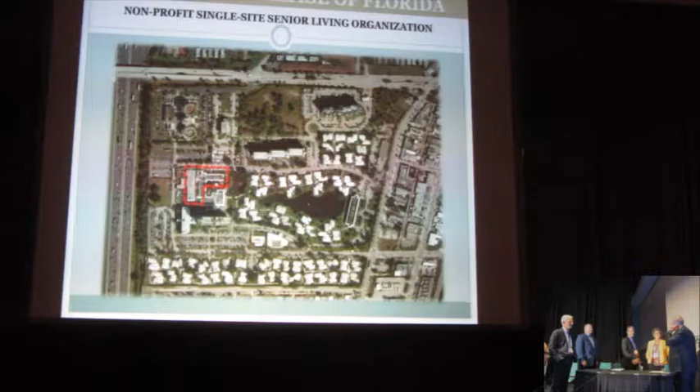Good afternoon. Well, where is John Knox Village? We're in South Florida. We're approaching our 50th year as we enter 2017. With a little over 1,000 residents, we went on the journey to replace our health care with close to 12 homes, or 144 residents of our 194. We're also within the top 3% of the communities across the country that have a rating of A-. So we had good, sound financial backing. Well, here's the campus, and the red area really depicts the healthcare center that we have on this 70-acre campus. And you'll see some pictures in the upper area where we moved it to.

How many of you, by a show of hands, have been in a skilled nursing residence? Well, these pictures should look pretty familiar to a traditional grandma's nursing home. Long hallways, medication carts, nurses' stations, semi-private rooms. Folks, we can do better than that, and we should.

We went about repositioning our healthcare at John Knox Village by making sure that all of the stakeholders, from our board of directors to our residents to our staff and our greater community, all understood that Greenhouse wasn't where we were growing plants, it was where we were growing people. They weren't coming there to die in a nursing home. Yes, people die, but people have an opportunity to live out a life and thrive. We focused on person-centered care. We've heard that for many years.

But empowering the staff is not just turning the keys over to the staff, it was taking the hierarchy from doctor, nurse, caregiver and flipping it upside down, so that we could have 128 hours of additional training that the staff would go through so that they truly knew the elder and they would be the best ones to help in the care decision making and also in making a real home.

We had residents that were involved in our community, and they really wanted to make sure that they had private rooms, private baths, and that at the same time we could jump the market. Instead of just painting and putting new carpet down in a semi-private skilled nursing residence or creating private rooms for everyone, we jumped the market by being the first 12 homes in the state of Florida by really creating home.

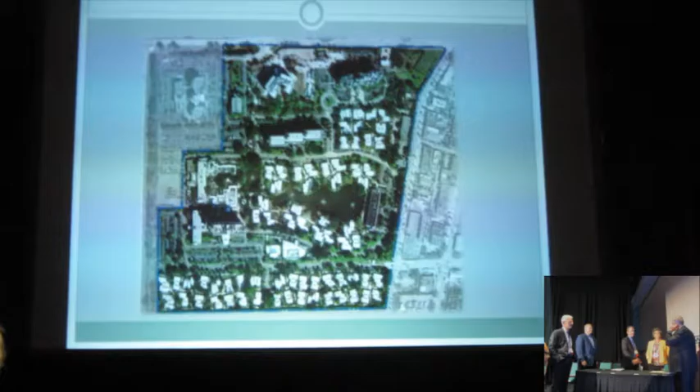So this is the John Knox Village campus. To the west is I-95, which is 10 lanes of death. And I think originally that was where the skilled community was envisioned to go. The pointer worked, I'll show you. Oh, right there. Right there. Yeah. So we studied that for a while. We showed everybody what it'd be like. How does it meet up to the program that we had?

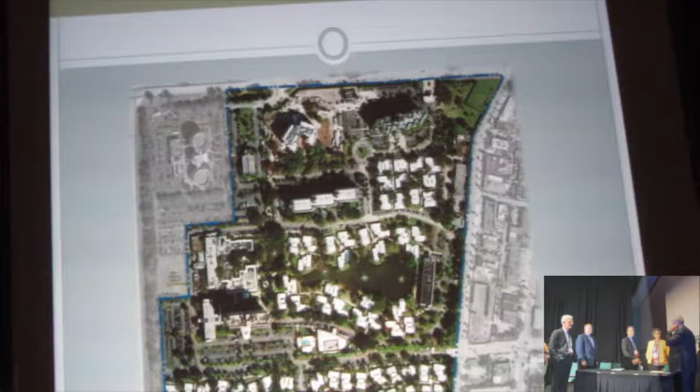We also studied the northeast corner up here, as well as they had this wooded area that was right in here that every time we showed up, there were residents walking through on these paths. And they actually had a fund to replace the trees in other locations on campus, and I think the fund was up to $400,000 and some. It's like, why take the trees down? Let's use them.

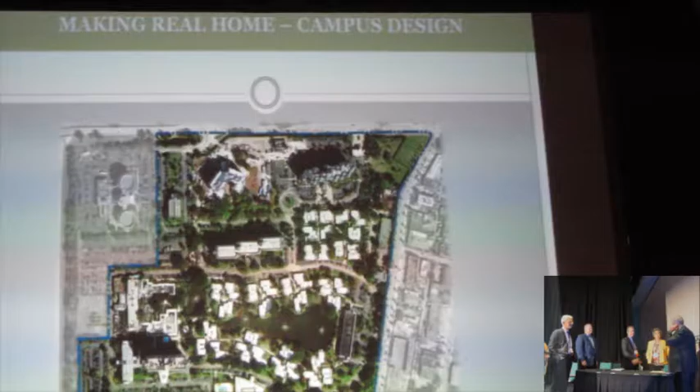So we started to integrate the building into the trees. Now it's not working. The top part of the building is the main entrance to the building. The bottom half is what we kind of consider the residence entry. They can come across and go to the bistro and the spa through that wooded area. So there it is blown up. This is the wooded area that I'm talking about.

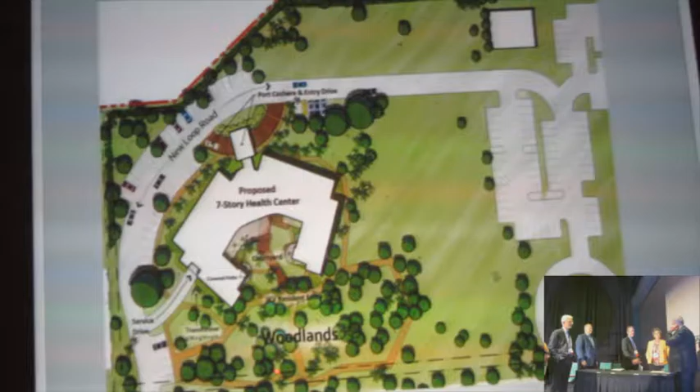It's got the front door on this side, that's New Loop Road. And most of the community's over here, there's a high-rise building that's just off the screen here with a lot of independent residents who could utilize another venue, dining venue and amenities. And then it has a service area off to the side as well. And we tried to preserve future growth opportunities.

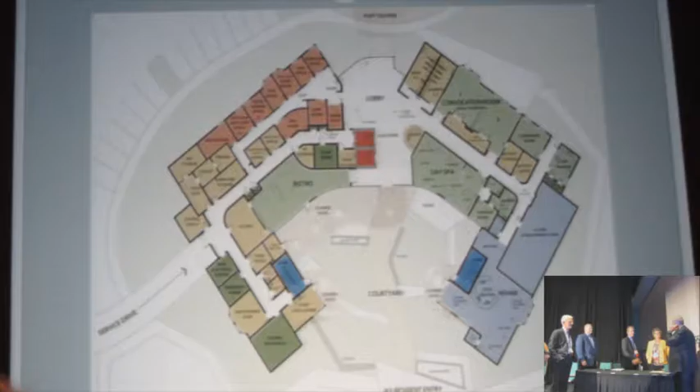This is the first floor with the service off to the left. The training kitchen is near where all the administrative spaces are. They're on the top left in the orangish color. And then as you get to the other side, you have the convocation, the day spa, and the rehab and fitness gym. This footprint was all driven by the home. So we created the home, we put the homes together, and this is what we work with on the first floor.

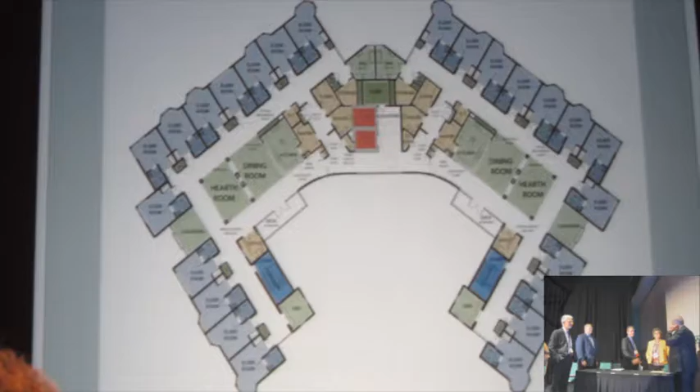We talked a lot about the sanctity of home. Everything that we went through, always we went back to what do you do at your own home. And you don't have staff coming in and out of your own home unannounced. So these two homes are totally separate. They don't share any spaces other than the elevator lobby. It's kind of like an apartment.

So then if you look at just one side, which is the home, we have the 12 elder rooms that kind of wrap around what I always like to call the heart of the home, and that's the kitchen, dining, and hearth area, which are that green area right there. We still have all of the required regulatory spaces. You try to minimize the medical aspect of the care and enhance the elder, making the elder center stage. They get up when they want, they eat when they want, they pretty much run the show.

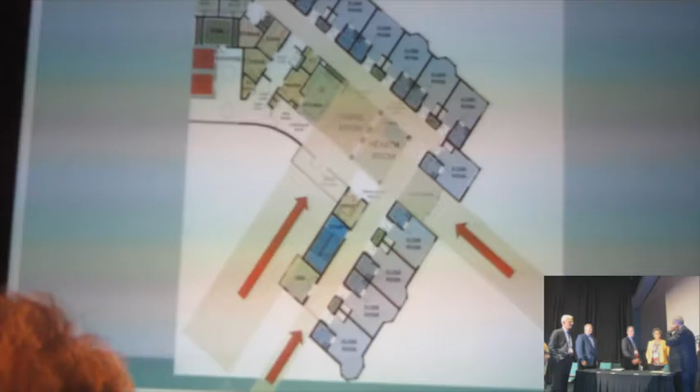And I had mentioned that light was important. We were concerned about it, so right away we started talking about how can we get light into this home. So at the end of each corridor, as well as a sunroom, which is right here. That's one of the components we added that bumped our square footage up a little bit. You walk into these homes and they are really bright, and they have incredible views out of them, especially the ones that are looking towards the wooded area.

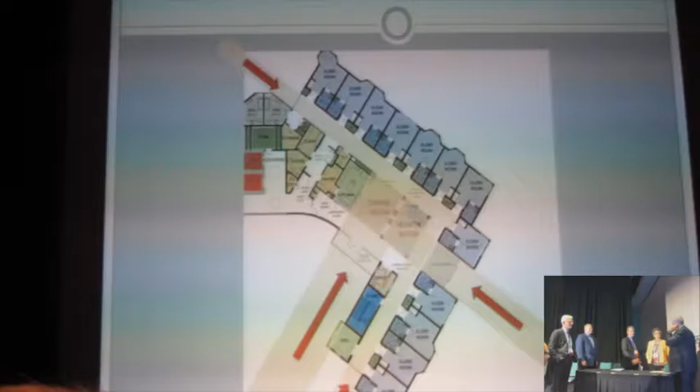And then we also carried that into the elder rooms as well. You'll notice as you look across there, we've got half bays, full bays, straight windows, and the ones that are straight are taller and have more glass. And then we have corner units and what I call super bays, which you'll see at the very top and the very bottom, which are kind of like a bay that you go out and you have 180 degrees all around of view.

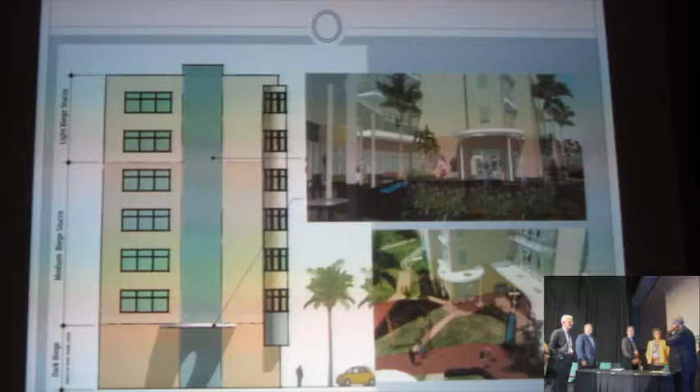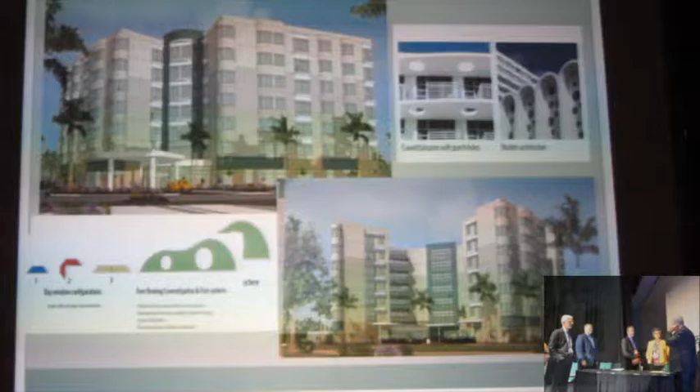So as far as the architecture goes, the building is pretty tall, 7 stories, so it needed the base and a cap. So we started to design it around a modern international style. And this is the front, which is the view that is seen from off campus mostly, and this is the view minus the trees from on campus.

So then, regulatory challenges. Some of these are no longer challenges, but they were for us. Open kitchens, accessibility in bathrooms, the laundry rooms, the entry doors I put in there just because that annoys me, so I'm going to show you that. Hearths and fireplaces as well as the nurse call.

So open kitchens were not allowed under the life safety code because of the cooktop, and the smoke developed to a means of egress. So when they incorporated those into the 2012 life safety code, they allowed us to go back to the 2000 and allowed us to do this, but we had to do a waiver to do it. So we went through the waiver process, and you have to redo that waiver every year until the new code was adopted. So thank goodness the new code's adopted. We don't have to worry about that anymore.

Next one is accessibility in bathrooms. This was a lot easier when there was just ADA around. They took the ADA, put it in the building code, and this became more complicated for us. But the industry has found that moving the water closet away from the wall and being able to allow access or assistance from either side is a huge benefit to our population. ADA was designed around a younger veteran with upper body strength, and we have a bunch of older women mostly who lack upper body strength.

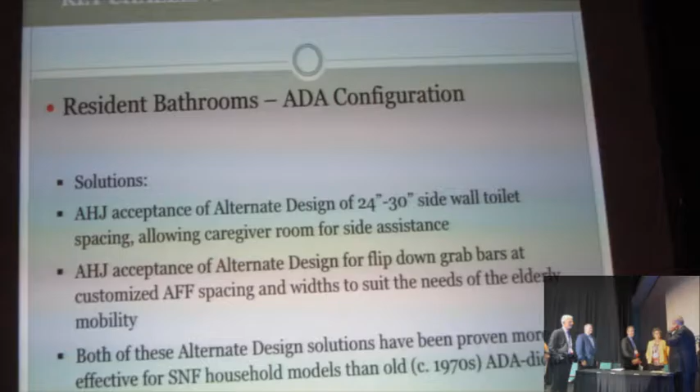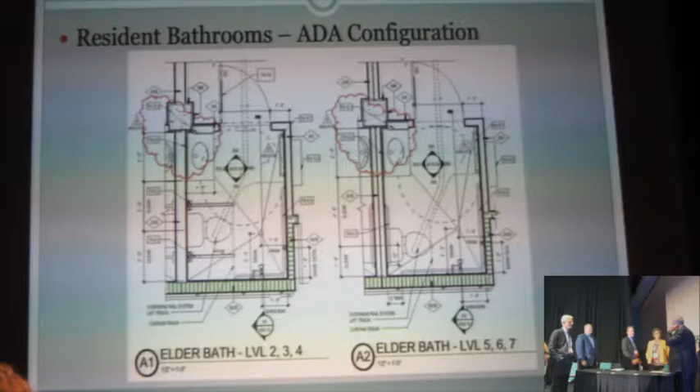So by moving the water closet out and using fold-down grab bars, we are exceeding ADA guidelines, and every time we've talked to any access board, they always agree with us. But having it get into the building code complicated it for this project type. So we got approval from AHCA and all the state agencies to do that, but the local building official wouldn't let us do it. So we had to go back and build a wall to move the grab bar and shorten the lav so that we had the 5-foot clear, so we met the requirements of ADA.

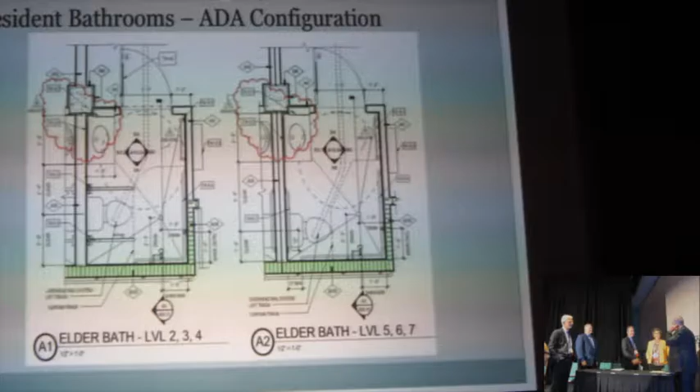And we went back and did that on 100% of the rehab units and 50% of the skilled units. And in my opinion, made it less accessible. So that was something that we didn't succeed on. But that's a picture of it.

And then one of my personal pet peeves is being required to have a 44-inch wide door, and in a residential environment, no one has a 3'8" wide door in their home. You can do it out of wood pretty easily and it looks okay. If you're doing it out of metal, which is a little more durable, they don't have a stamp for a 3'8" door, so they use the 3-foot door stamp, and it looks really odd.

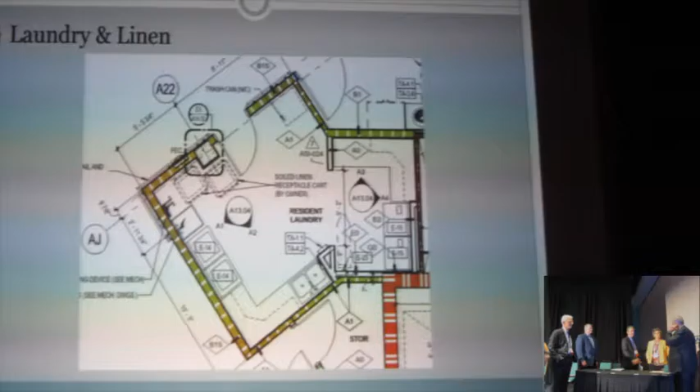And then fireplaces. The gas burning fireplace isn't allowed, and we got around it by doing an electric fireplace. And you can put them in now with a waiver, and so now if we were to do it again, we would probably have the gas. Though electric has come a long way and is looking pretty good. It looks a lot better than it used to, but we ended up with an electric one.

And then the nurse call. You have to have a nurse call, and it has to go to a central location, even though they're now wearing the walkie-talkie or the phone on their belt. So no matter where they're at, they're getting the call and they know where to go. There's only 12 rooms. Still have to have the light.